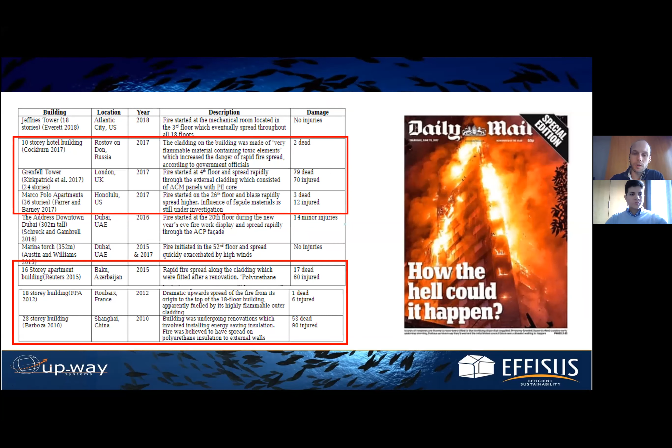And some covers from newspapers, just focusing on this kind of information, because this is really an important matter to be discussed. And here, before entering the layers of the facade, I would like you to take a look at these pictures, because they show that understanding the behavior of fire in a facade, the way it can spread, the things that can influence the way it behaves, is a really wide topic to be discussed.

So this is not a linear approach. We really need to understand many things, and it is still not that clear regarding fire and how it can reach the different levels and spread all over the facade. So here we can, for instance, see some pictures. Here the ignition, the source of fire, is coming from the outside of the building.

So it's an outside source. Here we can see the fire starting at balconies, with organic materials that we always have there, and then here the fire spreading from floor to floor. For instance, an explosion in a kitchen or something that just happens and brings the fire to the next floor.

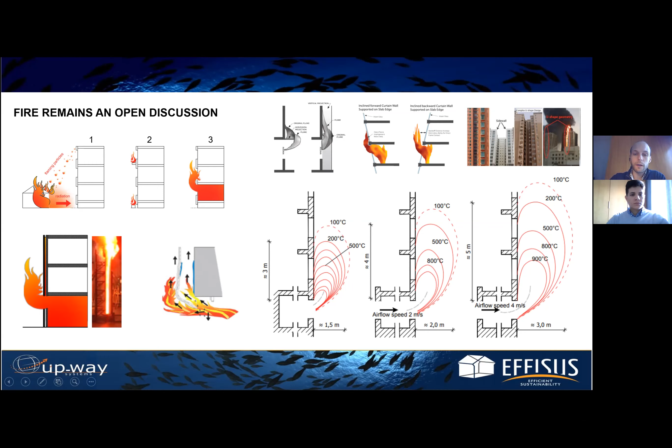So this is just to mention again that this is an open discussion. We need to understand many things, and what the market or the main response from the markets is being given by this kind of regulation. The regulation is also pretty much discussed - not everyone is in accordance with it, so that's a lot of discussion.

Here we have some shots regarding the two main markets we are involved in, and that we've been asked about many times in terms of fire: the UK market and the Middle East. João, would you mind sharing a little bit about what these regulations are asking right now in terms of fire?

Of course, Henrique. In terms of regulation, it's important to mention that we've seen a push mainly because of these events that you mentioned, specifically in the UK market and Middle East market - a lot of these fire events happened. Every time those events continue to happen, we always see a push when it comes to regulation. For instance, we see at the time a minimum classification for a high-rise building of Class B for 18 meters tall.

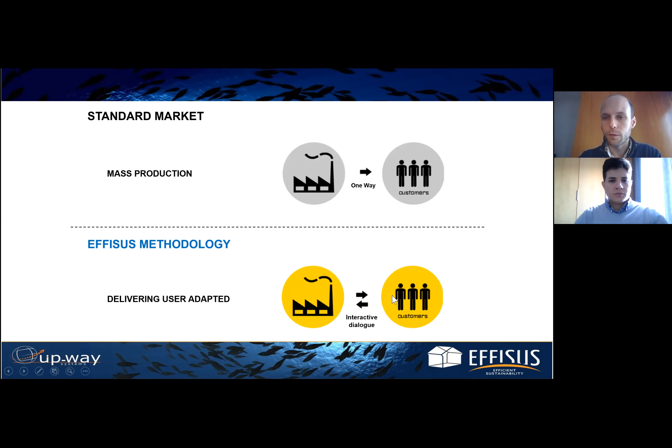Just very briefly, as we've been saying in all our presentations, mass production is the type of system the market is going with right now. So we have very standard products reaching the customers as a possibility to buy, but we don't have this discussion on what is important or not for the project, and the flexibility from the manufacturer to adapt to the project needs. This is something we find very important, to have this interactive dialogue in order not only to provide a good solution to our client, but to understand the project needs and provide the best solution for those needs. So this is something that we do every time.

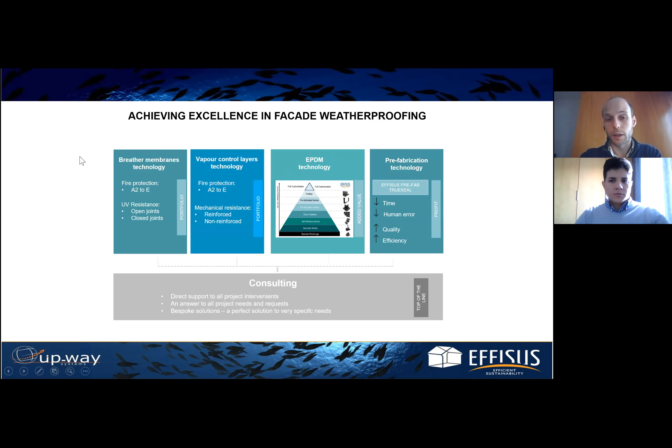So again, something you should already be aware of: we have 4 main divisions within our portfolio of products and technology available, and our consulting department supporting these 4 blocks of information. So Breathable, VCL, EPDM, and prefabrication, which plays with all the other technology available and turns it into bespoke products or products that fit the very specific needs of each project.

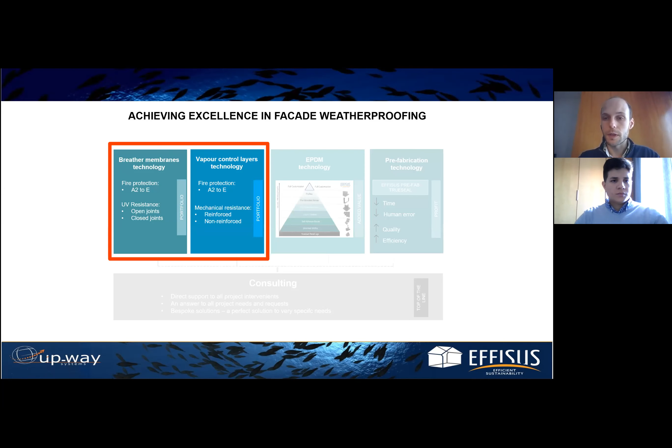Today, regarding fire, as you may know, we have 2 main A2 fire systems, and we'll be focusing on more detailed information regarding these systems. So we are talking about fully covering the walls of the Rainscreen in terms of weather on the outside, so a breathable membrane just outside the insulation layer, and the VCL on the inside, both A2S1D0.

Here we have a table we call a product selector, something you can easily go through in order to understand what's the best product to use. And here you can easily identify that we have an A2S1D0 fire reaction breathable membrane. So this, as we're talking about fire today, is the one we'll be discussing.

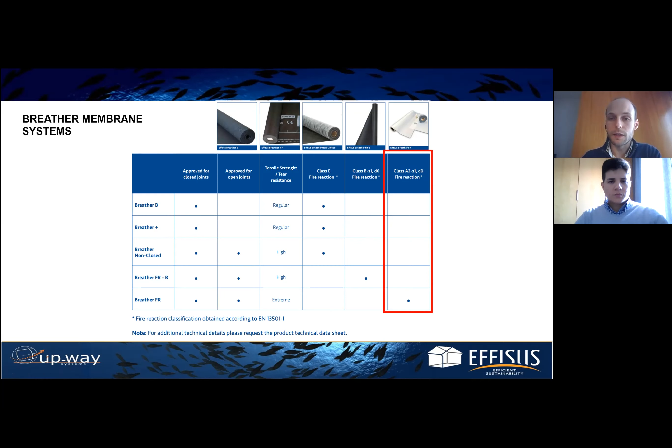João, would you mind just sharing some information on this system, please?

Absolutely. So yes, we discussed this a little more deeply yesterday when it comes to breather membranes. We all know the importance of having a breather membrane. In this case, it's vapor permeable, to allow the vapor coming through the inside to go through the outside of the facade, but still remain a weatherproofing barrier. In this case, we always recommend, if it's applied on the insulation, to be as dry as possible. So this membrane is a W2. In terms of fire reaction, which is the main topic today, it's the best classification you can currently get in the market, which is A2S1D0.

As I mentioned, we have had this product tested and ready since 2011, so we have good knowledge of this technology, and the product is fully certified, compliant with most regulations. In this case, it's important to mention this fire reaction classification was achieved tested as standalone, following the 13501 standard. But we went a little further and tried to test it including the accessories - fixing, temporary fixing, fastening, sealing, perforation. This is all included. We tested that, including the accessories, and it also achieves the A2S1D0 fire reaction classification. So this is very important to understand how this actually works as a system, which is why we classify it as an A2 FR system, including the breather, but also the VCL that we're going to discuss later.

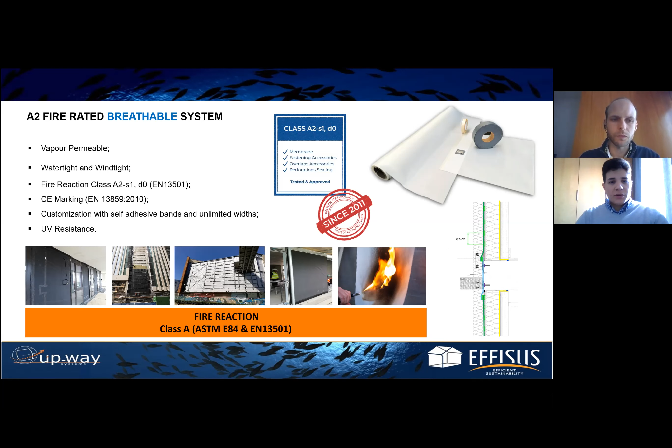Okay, very good. And here also some highlights of the different performance characteristics from this breathable membrane.

Would you like to comment on this too, João, please?

And because the whole properties of materials are based on fiberglass, you not just gain fire performance, you gain a lot in tensile and tear resistance. In comparison, a standard Class B averages 300 to 390, ours go up to 2000 newtons per 50 millimeters. So this is completely different.

This is again a very important factor depending on how it's installed. If you see, for instance, the CWCT manual, tensile is one of the main characteristics to look into when picking a breather membrane, because of how it should hold this type of perforation or tear during installation, since sometimes it's total exposure for up to 6 months. Another characteristic is UV stability.

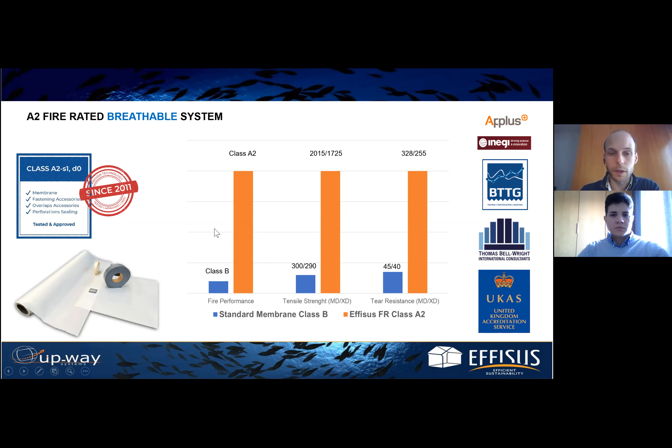We every time see damaged breathable membranes on buildings, on the facade. So it is really important they are able to keep their condition as it was supplied for as long as possible, and having these kind of values is of course a really interesting achievement for this kind of membrane.

And so, just some pictures of this very specific system being installed in UK projects. We have different kinds of projects, from residential to universities to shopping centers. So we have here different kinds of installations.

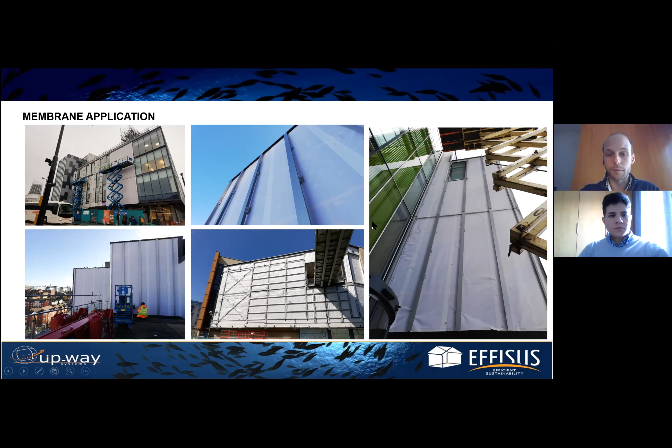So many of the requirements, of the demands, of the queries that we have been receiving are related to keeping the fire away from people's lives. So for instance, residential is a very common kind of building that is requesting this kind of membrane performance.

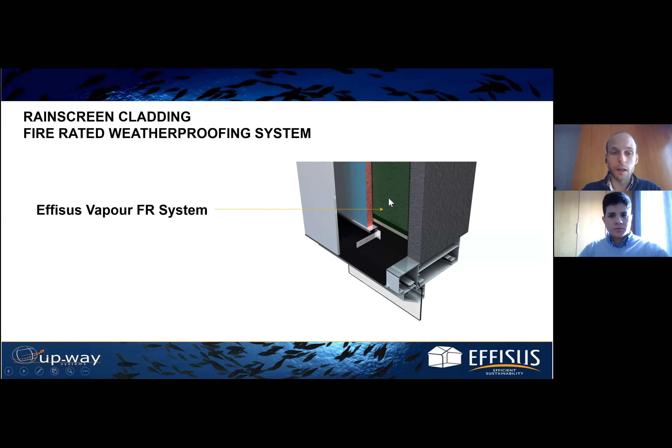So we'll just go now through the Vapor FR system, that is our VCL, also fire rated. So we can easily, looking at this information, understand that the same thing has been done to this system as, Joao, you were saying, for the breathable membrane.

So also here regarding the VCL, the same classification was achieved, A2, S1, D0, and again not only the membrane, but the fastening, the fixing tapes, the overlapping tapes, the perforation sealing - everything in the system was tested as it was with the breathable membrane, right?

That's right, Enrique. And this is something we developed later on during this process. Since we already had the technology ready, available and made for the breathable membrane, we used the same expertise, the same technology, to come up with the VCL. So in this case, we're very proud to say we're the first one in the market to bring this A2 S1D0 VCL, and it's pretty much based on the same components - again fiberglass, aluminum - this is the base composition of these materials.

And as you're saying, tested again as a system, achieving this fire reaction classification, including the whole accessories for fixing and fastening. And of course, when talking about the VCL, we want it to be a vapor barrier, but also understand that it has good performance in terms of watertightness and airtightness.

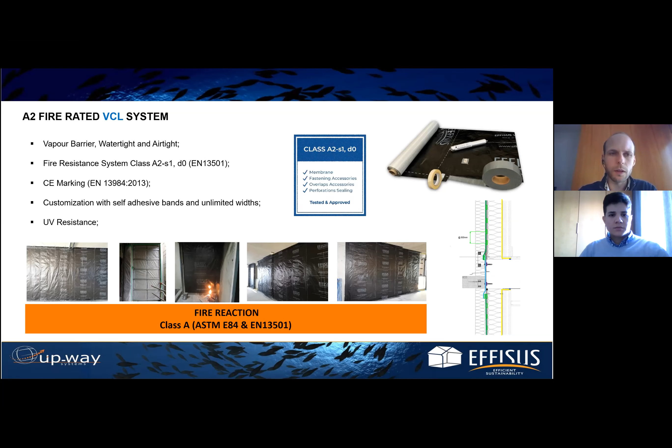So many of them are really watertight and airtight. And when we're talking about this very specific VCL, we know it has, and we will be able to look at these kind of values later. So for instance, water vapor resistance is really high. So what would be a standard VCL, João?

In terms of material, we've been talking of plastic. Yeah, polypropylene, stuff like that. And this is usually polyethylene. So usually it's around 200, 300, the water vapor resistance. This is the SD value. And ours goes up to 7,000. And we can confidently say it's even more.

It's actually the standard that we use, which is the EN 1931. It's quite complicated to replicate or to attest for all products because of the whole composition, since aluminum is very tight. So we did it after a long time testing the samples, and we achieved this value as you see here, 7,500. Okay. So this may be possible because of the presence of aluminum.

But we are also taking advantage of our fiberglass in order to achieve these very different tensile strengths, right? Absolutely. Because of the fiberglass. In this case, you usually say a standard class B is polyethylene 400, 350. Ours go up to 700, again because of the fiberglass.

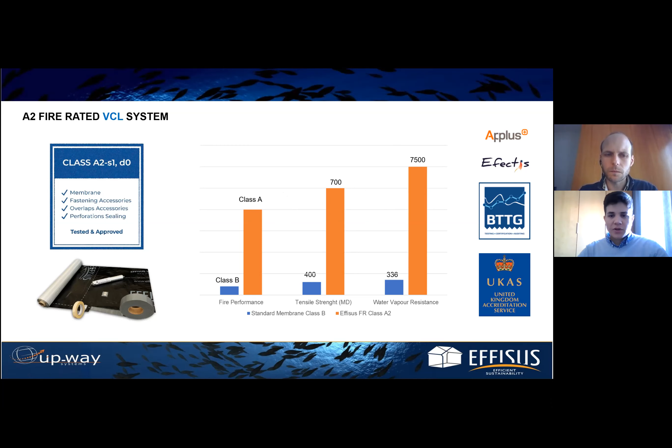If you see the breather, it has even higher. But this is a thinner material. It's different. It has fiberglass on it, but it's completely different when it comes to the mechanical resistance. But we can comfortably say it's at least twice as high as a standard one. Okay, thank you very much.

So here we can see some pictures taken from sites where we see the VCL already installed, and we can understand the sealing with the slab was done. And I can let you know that it was done through self-adhesive double-sided tape. So we have here a very easy installation procedure. Just applying a line of tape and then connecting the VCL to the top of the slab.

And all these connections, all the overlapping tape, every single accessory that was used here, as João was saying before, was included in our testing. So when you are looking at this final installation, you are looking at a system that is fully approved, that was fully tested, not only the membrane. So we have everything studied, we have everything tested, and we can see later on some of this testing being represented.

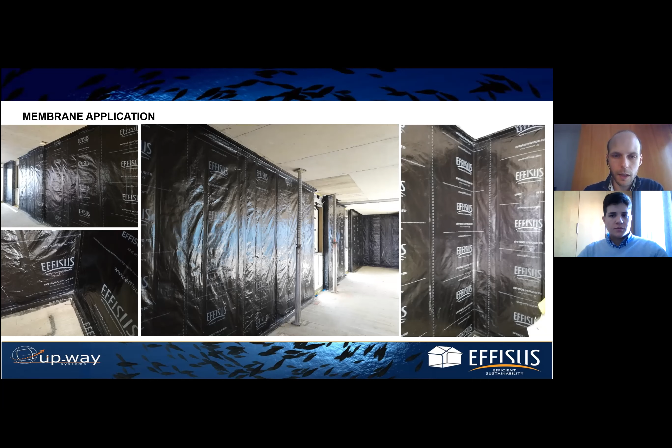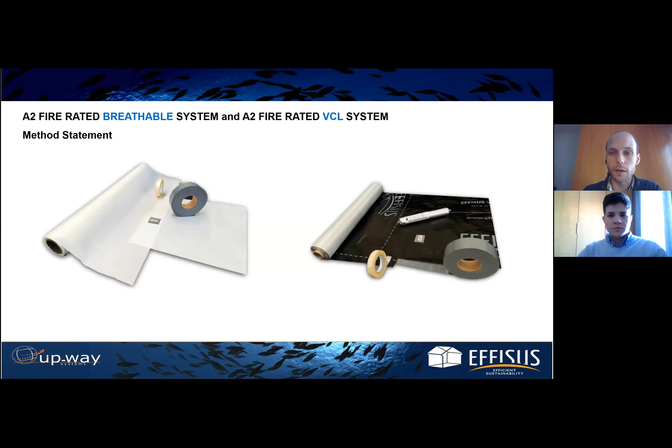And so just having a quick look into the method statement of these two fire-rated systems, mainly to understand that this is no more than a current installation procedure in terms of installing this kind of membranes and systems. These pictures are applicable to both systems. So the first conclusion is that both systems are applied in a very similar way.

We are talking about similar base material, like João was saying. It is fiberglass-based material, and this allows us to use the same specific accessories in both systems. And this is a large advantage when at site we are playing with the full system. We don't have that many different accessories to provide to the site and let them use them in the best way they can, so they don't mess up. So here no confusion possible.

And so we have tape here. We have a tape for the fixing lines, single lines spaced half a meter from each other. You just apply it directly on the substrate, normally the CP board, and then you have overlapping details, vertical and horizontal. Two lines in this case of the very same tape, and you just apply it like this. So having this easy concept of going with the upper row.

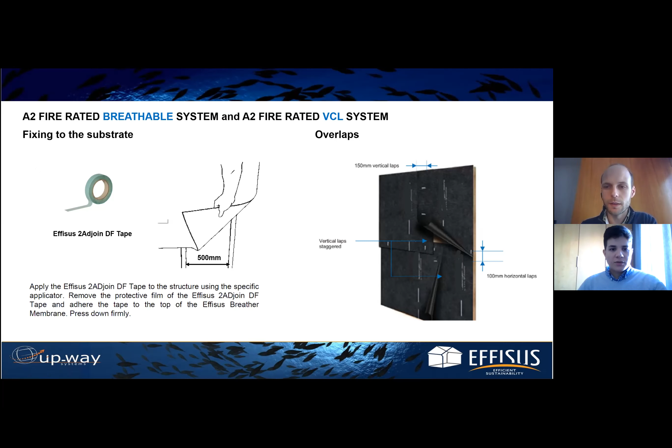Here the main thing is just to mention that even though we have different base materials for both membranes, the installation is quite simple, quite standard in comparison to others. And again, we provide all this information for installation, even including site training. Yeah, it's exactly that. And here we can see also some of the details that we were highlighting yesterday for the breathable membrane. So this is exactly the same today with these fire-rated products and systems.

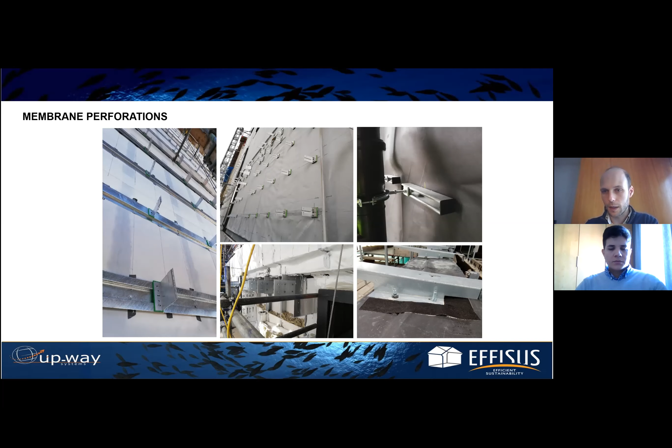So when we still have to deal with this kind of perforations, for instance, these bracket sealings, we can still use the same tape that we were discussing yesterday, so the 2ADjoin DF tape, and still achieve the A2-s1,d0 classification as a system, right, Joao? Right, that's correct. So as we were saying, both systems were approved as a system, so full, all accessories included.

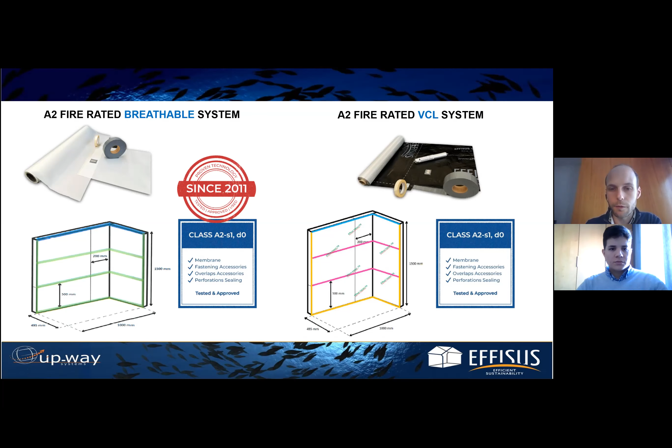Of course, these accessories are already installed in these mock-ups, in this panel here. But we also have to assess the calorimeter value for each accessory in a single test, so a test alone. And we understand that the results are exactly the ones that we have been discussing. So not only A2, which means it's a non-combustible material, limited combustibility. It does not take the fire anywhere else.

But also regarding droplets, no droplets are created, so d0, and s1, which means very low smoke production from a fire that is happening on the membrane or being applied to the membrane. So A2-s1,d0, that's the final classification.

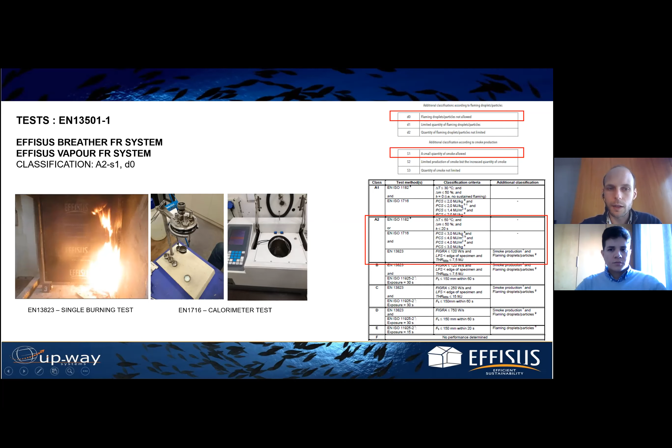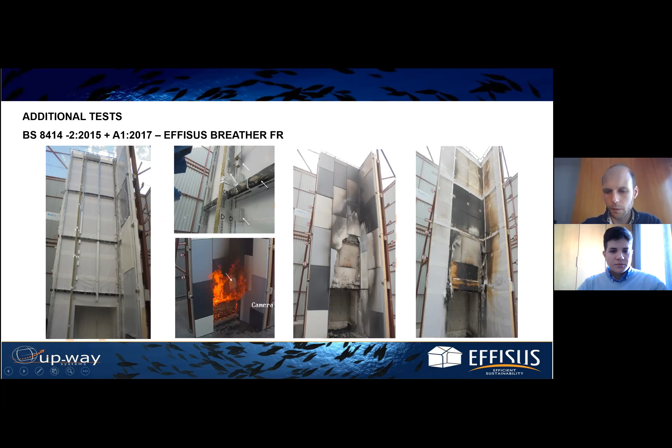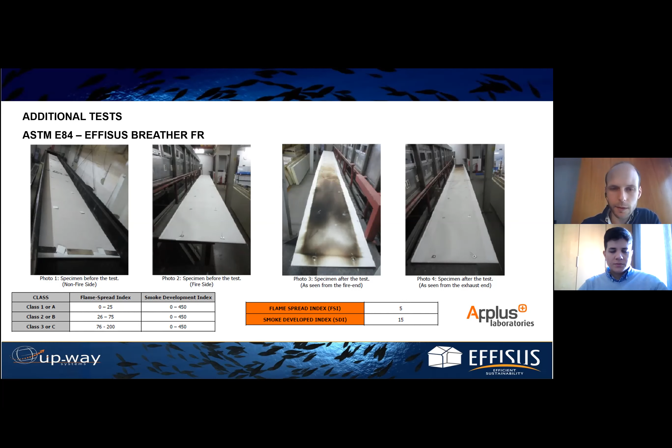Okay, so not only an A classification, but also a very good A classification. So really close to absolutely zero, much closer to zero than to the border, the max variant. Yes. Okay. So this is just a very specific application that we had.

So a project, a very demanding project, was asking us to provide a solution that was able to improve the facade fire performance, but having very, very combustible material on the back of the facade. We could not remove those combustible materials, so we would need to cover them with our membrane. As we were saying, we are playing in the Middle East market in this case, and so we came with our vapor FR membrane, and it just covered it.

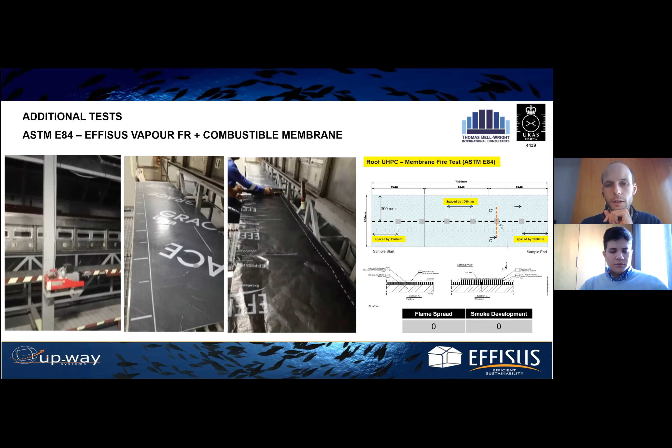So when I mentioned that our materials protect against the combustibility of other ones, this is actually what I was saying, and not only that, because of other testing that we have done to understand how these materials work. So this is very interesting to see. It's very important for this project to see that we came up with a solution: instead of replacing, having all this repairing work, we just place our membrane on top of it. Yeah, and indeed, it was improving the facade fire efficiency, and of course, this was applied this way.